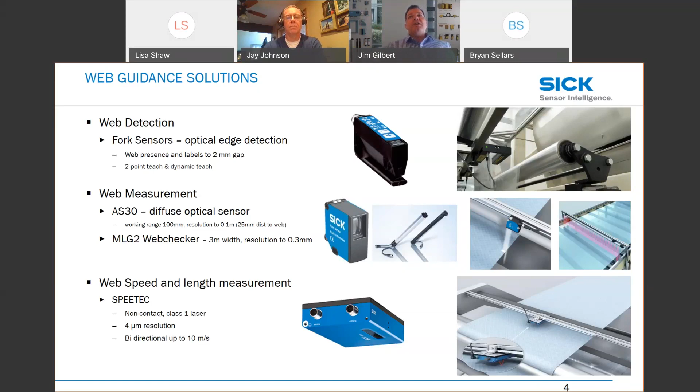Looking at the web control process itself, we're really honing in on two different areas: either the production of the web itself, or primary packaging, where an OEM might be using the web to place product, such as food stuff or any type of material inside of a package. These applications for process and production could be in web forming, web alignment, web layering, to produce anything from paper products to actual packaging that keeps product protected and ends up on the shelf.

On the primary packaging side, it could be packaging forms, bottling, and closing of packages. So these are the primary areas that we'll be focusing on today.

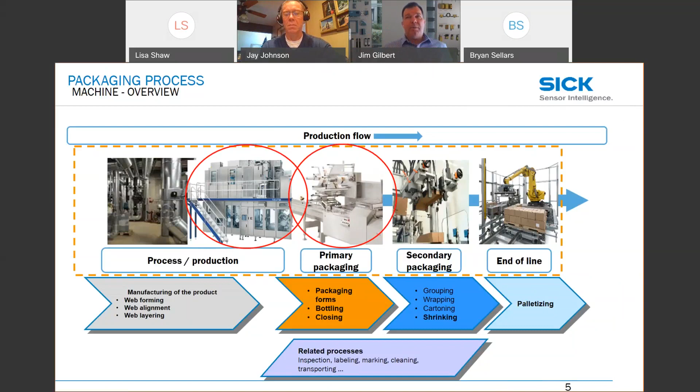When looking at web forming itself, there's such a wide variety of webs that exist out there. It could be anything from types of plastics of all different transmission levels, between opaque and almost totally clear. It could be machine tool looking at metal sheets and steel. It could be fabrics, could be rubber, and then obviously paper is a huge portion of the industry. The main point here is that each web has its own characteristics, and SICK delivers web control solutions to address all of these different web properties.

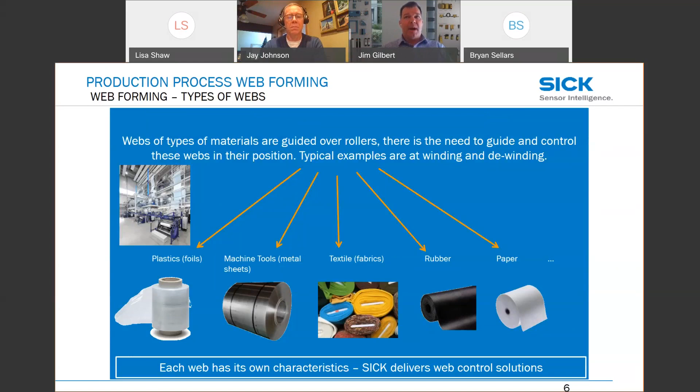Looking at the other end, so one is web production, and at the other end, the users of the web. This would be OEMs that produce equipment, and eventually this equipment is used. In this case, we're looking at a vertical form fill seal. The animation on the right shows the process: the contents are loaded in the bag, and then the bag is sealed.

So you can imagine all types of different food products. It could be coffee or it could be pharmaceutical product, and it can even be hardware, in this case looking at, say, screws or nuts. And think about the complexity of the packaging.

Resealable packaging is really taking over, and also the idea of putting the product directly into a pouch or a bag rather than putting it into a box. There's characteristics such as labeling and marketing to these bags, and that's really how the company is promoting itself, directly in a bag. So the point here is that the increasing complexity of packaging and recipe batching requires smart sensing throughout the entire process.

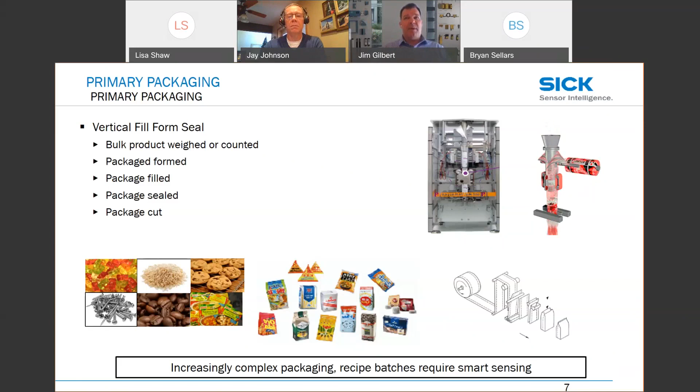So in general, there's market demands that are driving this increase in automation. One is just automation itself, trying to reduce or reallocate labor that's applied to producing goods. When you are applying more robotic solutions into your process, you need to make sure that motion is coordinated better. It could be for a picking application or just simply for web guidance.

And then looking at demographics, increasingly our population is aging, or we're valuing packages that can be resealed just for convenience. So that's a change in how people are spending their money. And then also on the demand side, there's flexible supply chains that need the flexibility of buying product where it makes sense to purchase it. So it could be overseas or it could be domestically in the US.

And then, as I mentioned before, this trend of resealable packaging and then frequent recipe changes. You can imagine if you go to your local gas station and pick up a product, and then you go to a big box store, you can find that same package packed in individual pieces and then packaged in, like a 48-piece box, that requires different levels of packaging.

So on the production side, for production controls, we could simply look at, say, a go, no-go adjustment. This might be a fork sensor that might provide that adjustment. It would just simply tell you, is the web there or not in the right place?

When you're looking at web measurement, this would be an analog output actually determining if it's drifting, and then you could use motion controls to readjust the web to make sure it's properly aligned.

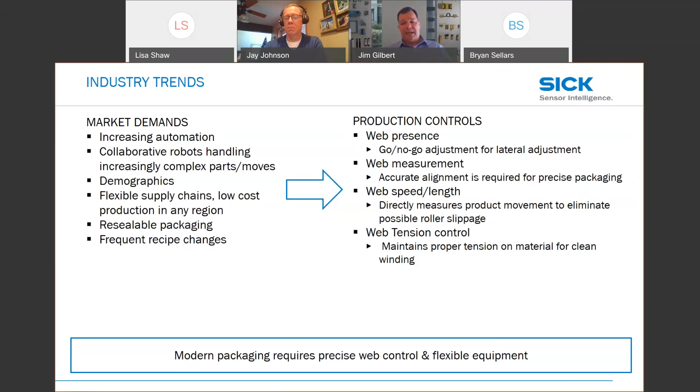So looking at some applications, up in the far left, we're looking at, say, as a roll comes off into a process. Here we have a fork sensor, and it's simply looking to make sure that the material is actually there and that it hasn't walked off too far to the left or right.

In another example, we're looking at a film guide in the center picture on the top, and this would be a place where we might want to have an analog output. We have a product called AS30 that'll look at if a product is drifting to the left or right and actually give an analog feedback.

This is an example that's a little different. It's looking at, say, a tire application, but you can see that this is really a different type of web. It's gummy. You can think of foodstuffs or other materials that might be similar to this as well. But in this case, you may need to measure not only the whole width of the web, but you want to know, is it drifting one way or another?

These types of webs can also be found to have multiple webs. So maybe there's 3, 4, or 5 webs all in the same location, and you need to keep track of all of them.

Down in the lower left-hand corner, we're looking at packaging, say, in this case, it's a sandwich, so it needs to be sealed properly. There could be some marketing, could be some labeling material that's on there. Also, if it was resealable, it's important to get that sealing in the right position. That way you don't disturb the resealable portion of the bag.

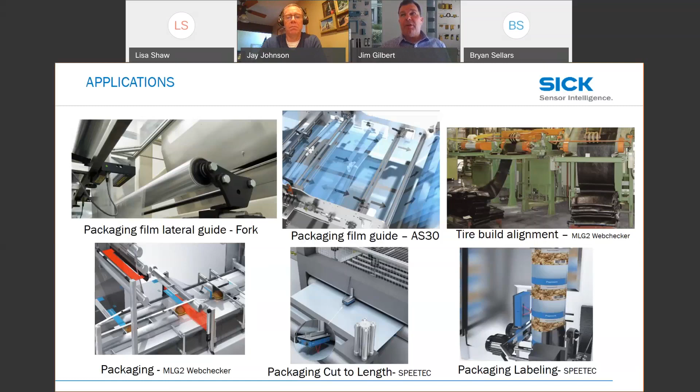Thanks, Jim. Yeah, thanks a lot, Jay. So now we'll take a look a little closer into some specific products that we just touched on. So first, we'll look at a fork sensor. So this is a fork with a wide variety of shapes and sizes. This one is low profile. It can fit into small spaces.

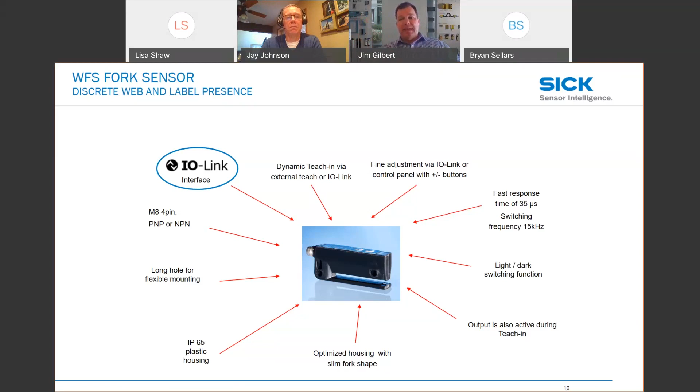There's a lot of different features about this type of product, so it can be used in a variety of applications. A big standout here is that it has IO-Link, and so this could be used in recipe changes, so maybe you have different types of materials coming through, maybe the position of the web changes, and you could reteach it on the fly. It could also be for different types of materials. Say you're looking at a clear material in one batch, and then in another case, it's a different type of material, opaque. You could reteach it remotely and adjust to the change. You would use a product like this.

It could be, again, in a vertical form, fill, and seal application. It could be applied at different points in the process, and its small size lends itself to fitting into tight spaces. Again, they're available in different sizes, so if you need more room for, say, web flutter, you could identify a fork of different size. There are other technologies. The one I mentioned before was photo or optical. There are also ultrasonics, and in some cases the same application could be solved with inductive, depending on the material properties.

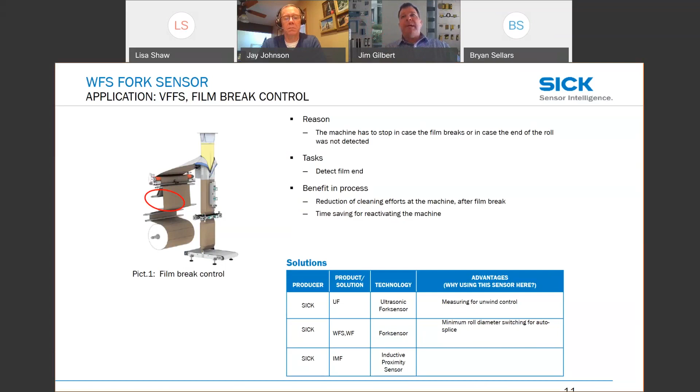Moving forward, this product is called an AS30, and this is a product that produces a beam and can be positioned up to 100 millimeters away from the web. And this provides an analog output of where the web is within a certain range. So it's extremely accurate and provides really good control over where the web would be. The standout here again is that it has IO-Link on board. So now you could do recipe changes, you could blast in new parameters to the device as your webs are changing, as you're going through different recipe functions.

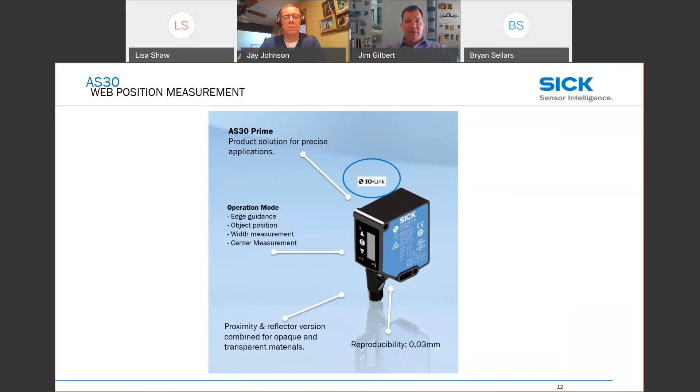So some common applications where you might find this type of product would be in consumer goods, looking at web guidance in a packaging machine. Same thing could be machine building. Again, maybe you're looking at the plastic film edge and sheet guidance. You could also see it in automotive applications, and the list goes on and on. But really, where you need a very precise analog output of where that edge is. You can also use this to measure the width of a web as well.

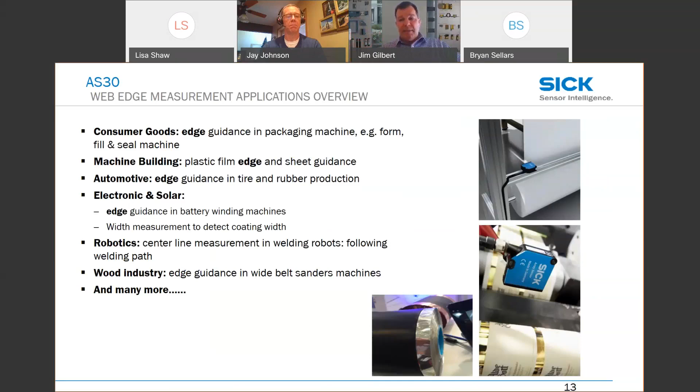So now, instead of just looking at the edge of the web, if you want to look at the entire width of the web, this product is called an MLG Web Checker, and this is available up to 3.15 meters wide. So you can see in the center picture, we could span the entire width of a web and provide very tight resolution as to how wide the web is.

But if you'll notice in that picture in the center, in the bottom, it has multiple webs. So not only can we provide position and location of these webs, but we can also do it for multiple webs, which is really powerful. We can handle up to 5 webs. So this is a really powerful tool that can be used in a variety of applications. Again, it's flexible. It has IO-Link built right on board, and then the accuracy that I mentioned before, up to 0.3 millimeters of accuracy when properly positioned. So it really is.

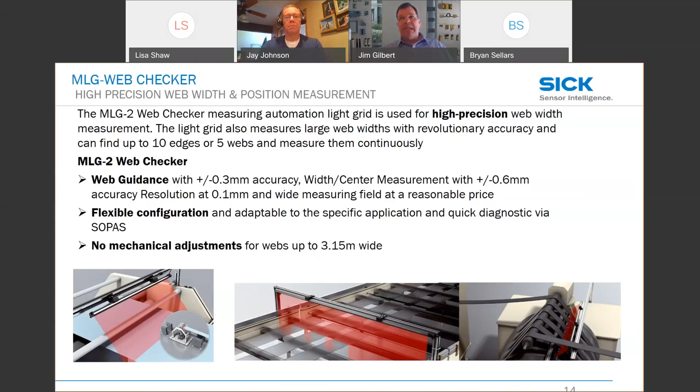Looking at how you position the web, this is different than your standard grid. So one thing is the geometry of positioning. The web needs to be positioned 1/3 of the way from the receiver and 2/3 of the way from the sender. So that's really critical to this process. So this is a different animal. It's not like a standard grid.

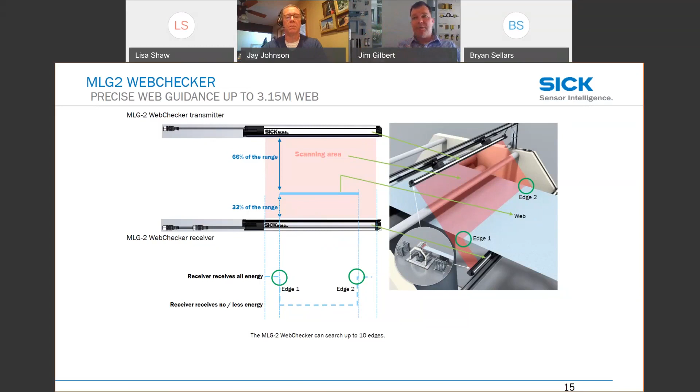What the sensor can do, and we'll be showing this later in a live video, is identify the first and last edge of a web. So at 5 webs, you'd actually have 10 different edges, and it can automatically find these. So this is a really powerful tool that can lend itself to a lot of things.

Looking at the portfolio, as I mentioned before, this is a bit of a different animal. SICK has a portfolio of light grid solutions for industrial applications. They come with different bus connections. You can look at Profi, EtherCAT, Ethernet IP, and CANopen. We can do the same thing with the web checker, but the big difference here is its accuracy.

We can provide up to 0.3 millimeters of accuracy, and these other devices can determine the minimum detectable object down to, say, 2.5 millimeters. However, those can be used at much wider widths, and they don't have to have that 1/3, 2/3 rule that I mentioned before. So just make sure you understand that the web checker is a different type of product. Next, we'll take a look at the linear motion portfolio, and I'll hand the ball over to Jay.

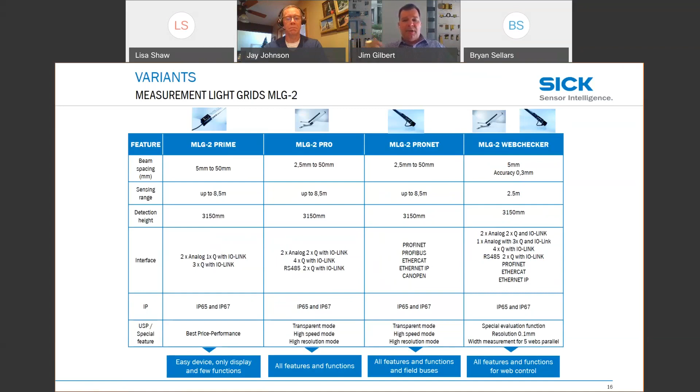Okay, thanks, Jim. Before we get started here, I'll just add one application example for those previous products that Jim spoke about, and that is typically on an unwind or a rewind when doing some process in the middle of a web. It's quite important to keep that web straight. Usually the way the control works is that we've got a wind side on the web with a motor and drive in torque mode, and we're giving it a torque reference, and that's what's keeping the tension on the web. That can be pretty good on its own.

However, if you have extensible material, in other words, material that could stretch a bit, or something in the middle of the process that would disrupt that torque, we can use those sensors that Jim just described in conjunction with your torque reference to the drive to keep that tracking straight. That may be old news for several of you if you're veterans in the web control industry, but if not, that's really the big benefit of adding that sensor to your machine.

So moving on with the linear motion, we can detect speed and measure length of web with a variety of sensors, typically encoders. Down in your lower left, encoders on a standalone basis, maybe on the end of a roller or on the back of a motor that's driving the roller. When that's not good enough, or when we have a chance of slippage, as we talked about earlier, especially in really precise applications, we may need to add a wheeled encoder.

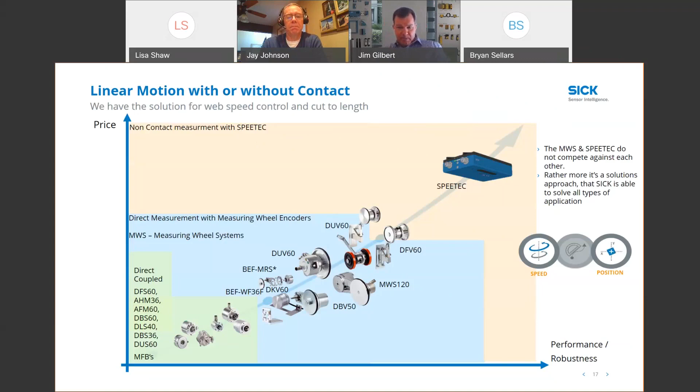Okay, so here it is. This is a non-contact laser-based sensor with an encoder output. So interfacing to your equipment today, it requires basically a quadrature type encoder input or even just a high-speed counter input. So nothing new, nothing needs to change on the control side typically.

It can measure very fast, up to 10 meters a second, and is compatible with quite a variety of materials, including textured materials, smooth or shiny surfaces, dark surfaces. Very, very versatile as far as the material or the type of web that you may be transporting.

Has a good typical industrial automation IP rating, so it'll put up with fairly harsh environments. Notice IP 65 on the body and 67 at the connectors. However, if you would need to go to an even more harsh rating, say an IP 69, this unit could be mounted inside of a box and the laser can shine through a certain glass type. So again, it can be covered up in the event that the environment is rough.

Highly repeatable, highly accurate. The unit comes in a couple of varieties today of resolution, either 4 micron or 100 micron. So depending on the accuracy that you need, we can get down to a very tight resolution, or if that's a little bit too much noise, we can loosen it up to, again, 100 micron resolution.

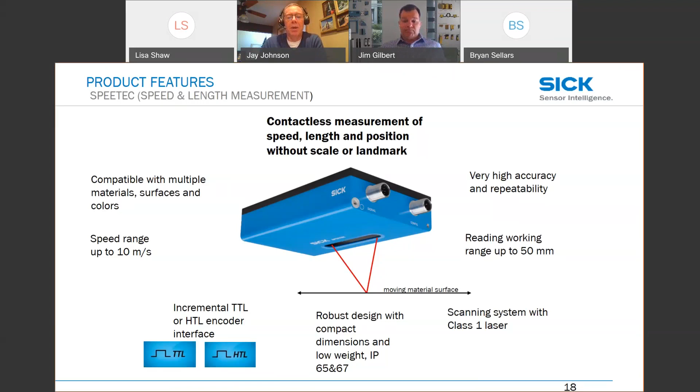Real quick, I won't go over the specs detail by detail, but typically you power it up with 24 volts. It can be ordered with either a TTL, in other words 5-volt output, or HTL, which is going to follow the power supply source. So if you powered it with 24 volts, you would get a 24-volt pulse out. And again, we've got A, B, and complement channels, just like a regular quadrature encoder. And what's that mean? A and B means that we can detect both directions.

It's very fast, powers up quickly, standard M12 connector. It's a nice package, nice aluminum housing, and again, set up to meet most industrial style applications. Go ahead, Jim.

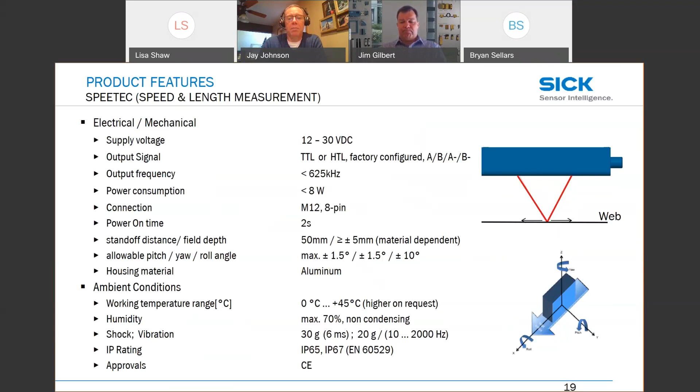And a bit about the way that it works. There are 2 laser transmitters and 2 receivers in the unit. It sends out a laser beam at a wavelength and then looks for the reflection from the material and looks at the frequency of that reflection. We then compare the transmitted frequency versus the received frequency, do some averaging between the 2 beams, and this is how we get a very precise, very accurate speed measurement that can also be used for length measurement.

So again, like any typical incremental encoder, we know the resolution. In this case, it will be either 4 micron or 100 micron. And so for every pulse coming in, we know that we traveled that distance. And so again, the product can be used to measure and control speed or cut to length applications.

I'll point out one thing on the limitations of the product. We do need some actual frequency difference in these signals to record a speed or to understand what the speed is. That means we have to be moving at a certain rate. So you can see in the bottom note, we specify that down to 0.1 meters a second, which would be fairly slow on any web speed and actually most material moving. But anything below that, we really can't guarantee the accuracy.

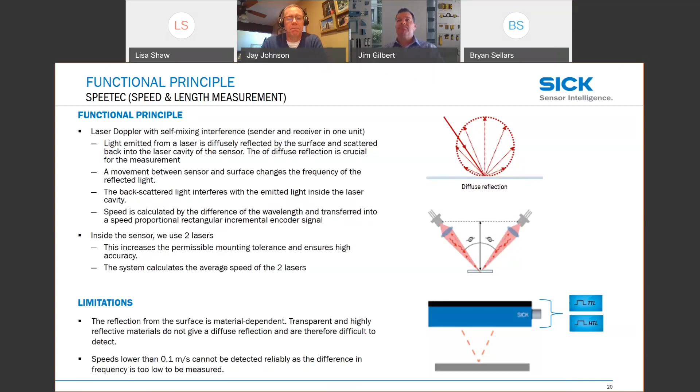The size is fairly small, about the size of a new cell phone. You can see it's 95 by 140 millimeters, and about an inch and a quarter, inch and a half deep. So it's easily mountable and really sets up easy.

I'll point out the red diagram toward the bottom of the screen, which shows the landing surface you need, typically 2 by 3 millimeters nominal. So this product can measure small surfaces such as cable, small extruded tubing, and things like this.

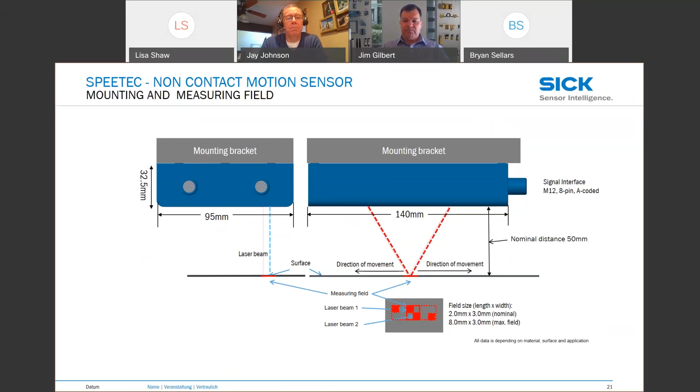Just a little bit about applications. Think of speed and length. Anywhere you need to control speed, you may need to coordinate multiple webs coming together to be laminated, or calendaring in tires, or food packaging with material coming into a wrapper and then cut to length. Again, we've got down to 4 micron resolution or 100 micron resolution.

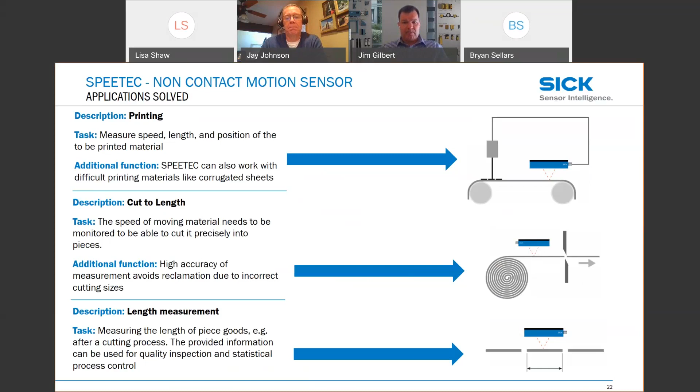That's a quick overview of the different types of technologies SICK offers. It's certainly not comprehensive, but hopefully gives you an understanding of some different solutions we have. In each case, whether you're looking at web presence, web measurement across the entire web, or speed and length measurement, we have different solutions, and in each case there's reasons why you choose SICK.

For web presence, we offer IO Link, price and availability of the product, in addition to its size. As far as measurement goes, you're looking at incredible accuracy that we can deliver from both the AS30 product and the Web Checker product. And as Jay just went over, the SPEETEC is really an innovative solution where you don't need to touch the product and still get both the speed and the length of a web. These are really powerful tools.

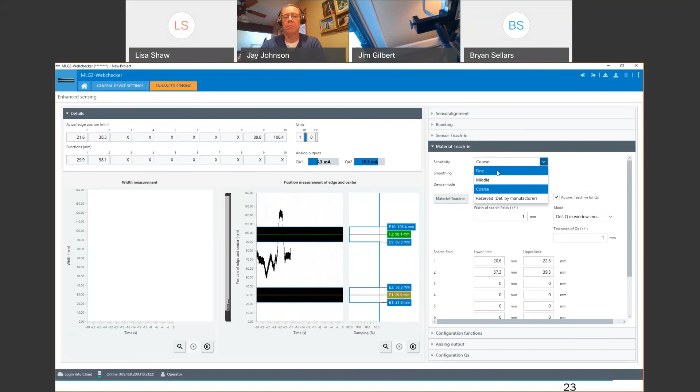If you did want to choose a clear material, you could choose different types, we call it fine, middle, or coarse mode. This determines the sensitivity of the sensors, and that could be used for applications such as on clear material.

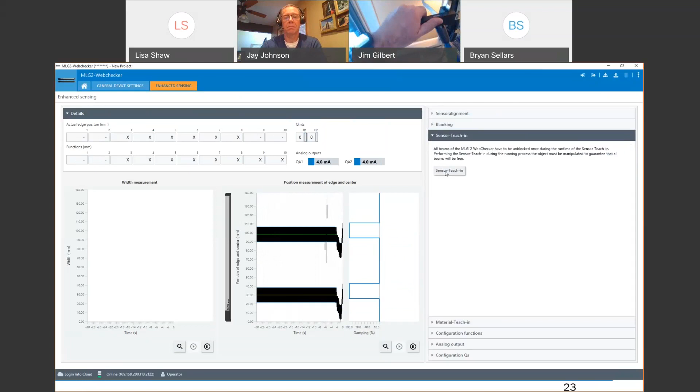The process for the sensor is basically you set it up, you can align it. Next step is that you would teach it without the material in place, so I would remove the web material. If you can't remove it, you would simply pull it side to side. At some point, all the beams need to see each other when you're doing the sensor teach-in.

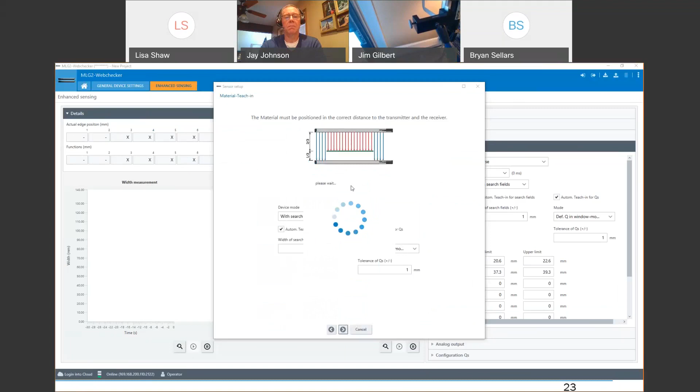Then finally, the last portion here is a material teach-in. This is a really powerful portion of it—we're actually teaching it to the web that you have. So I'm going to press this button, and it will identify my webs automatically. It gives you a quality of run, basically. Now here we have an output that shows the width of these webs, and this information can be streamed directly into the PLC by these field registers. Once those are mapped in, you can really control your process well.

So that's a quick overview about the MLG Web Checker. It's a really powerful tool, so reach out to your local SICK resource, and you can work on applications of your own. So I will stop my camera, and I'm going to hand it over to Jay.

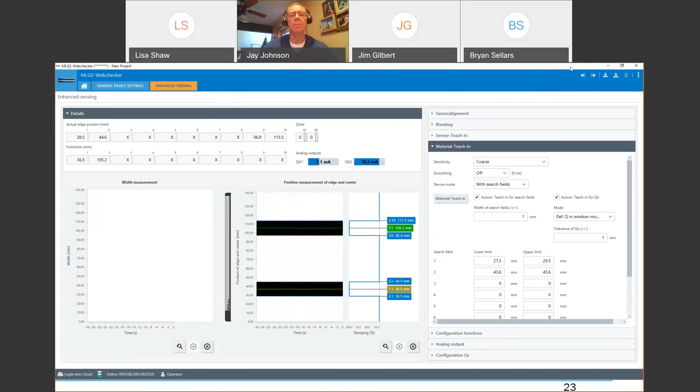All right, thanks Jim. I will change my view, change cameras. Okay, let me unplug my counter and turn it on, and I'll explain a little bit about what we have here. So we have the SPEETEC mounted over the top, it's a whiskey barrel that's on a Lazy Susan bearing. You can imagine the surface of this barrel is rough, and it's not smooth.

It has a lot of warping to it. I don't know if you can see that in the camera, and a lot of variation in color, including some stampings—there's a red stamping here. I've got some black dirt marks in the wood grain itself, and then it's varnished with some reflection. So kind of a rough surface.

I have the SPEETEC connected with a single cable with M12 connectors to a digital counter, and I'm also powering the SPEETEC through a battery that's in this box. I'll go ahead and reset. With the counter, we're actually just measuring pulses, or measuring clicks. So as I rotate, you can see the counter climbing, and I'll go in reverse direction.

So again, we've got an AB quadrature style signal, and we can detect direction. And again, I can move very slow, I can move very, very fast. We're good for material up to about 10 meters a second.